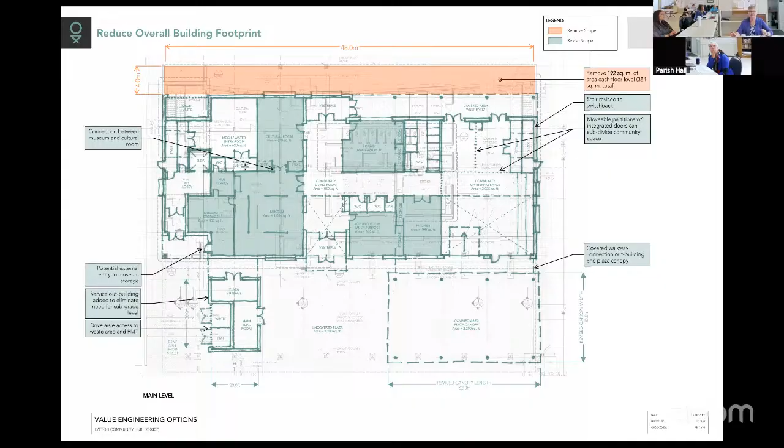Sorry, go ahead. Natalie, can you expand it at all? Yes, certainly, thank you, absolutely.

Thanks. So, the biggest impact of that is essentially that once we pulled out the basement area as well, we had a couple of spaces that weren't fitting well into the revised floor plan.

That was specifically the plaza storage and the electrical room, because we're trying to bring all those service spaces—the mechanical room, the electrical room, and the storage spaces that were in the basement previously—up to the ground floor.

And so that starts to eat into the usable floor area for the library, the museum, the community gathering space, that sort of thing.

So to avoid having too much of an impact there, the main planning change that you're going to see here is what we're showing: a small service building.

Sorry, sorry about that, I don't know what's happening there.

A small service building in the plaza area, which has now been opened up by reducing the canopy size. This building would include the plaza storage, the main electrical room, and then we also would be capturing the PMT, the pad-mounted transformer.

That's a large electrical item that needs to be on site, so we could include that and conceal it within this structure, as well as an enclosure for the garbage and waste, which is something we hadn't previously addressed in our planning.

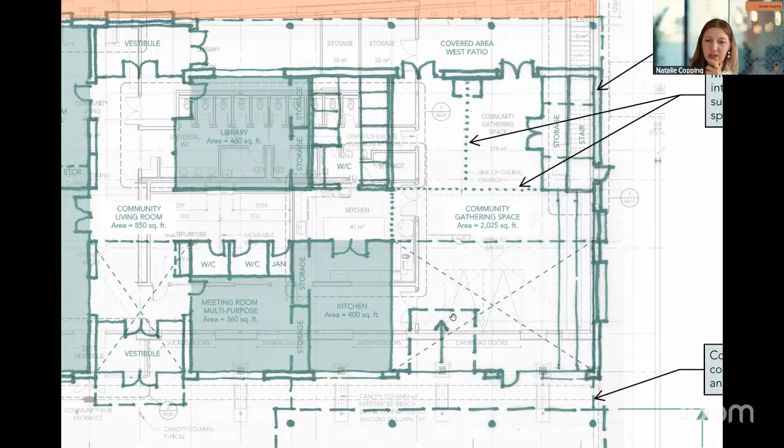Other than that, the dashed lines here indicate the double height, so we've managed to preserve that. The arrow here shows where the overhead door would be coming off of the plaza. You can see the revised area of the canopy, which has shrunk quite a bit from the previous version. So it's now only taking up about 35% of the plaza space.

So we now have an uncovered plaza area of about 2,200 square feet and a covered plaza area of 2,200 square feet. The dimensions are slightly different than the ones we had received in the request, just because we felt that having a slightly shorter and wider canopy gives you a little bit more flexibility to the size of a stage that goes underneath or the kinds of activities. You could have 2 rows of market stalls, things like that, whereas a narrower space is a little bit limiting in terms of some of those functions.

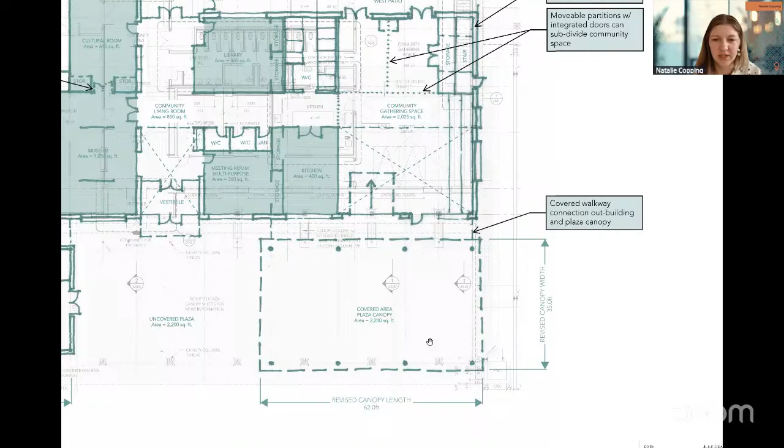So we would recommend going with a slightly wider and shorter dimension, which is what we've shown here. And I think that's it.

We've preserved the drive aisle on the south side here, which is needed to access the residences. So the suites now, with this service building, have a little bit more of a private entry. It's not right off the hub, and we do have this building creating a buffer in between the 2 entrances to the building.

This storage or service building also provides that windbreak for a substantial portion of the plaza, which is helpful. So rather than having to construct a separate wall for that, we can use this building wall to help shelter the rest of the plaza space.

That is, I think, it for the ground floor. Maybe the only other thing is you'll see here we do have that covered patio space preserved, so we have a nice space to sit and look out at the west side of the site and the views that way. And that is it for the ground floor.

Are there any initial questions about the planning here to address before we run through the second floor? Sure, let's go through some questions and comments with this before we move upstairs.

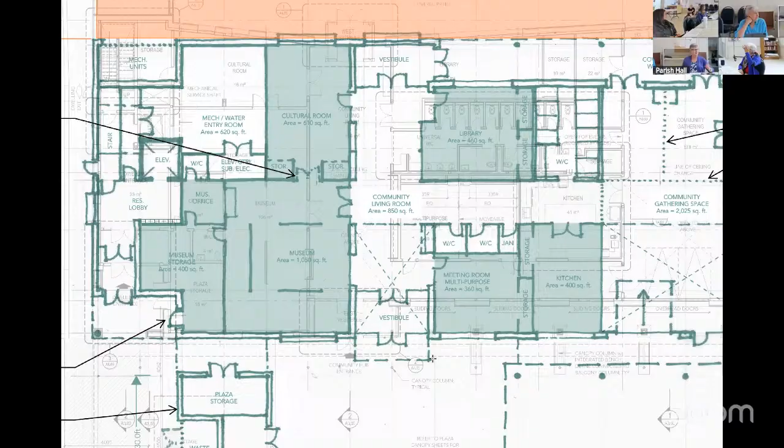Councillor McCann: Can you tell us the ceiling height of the main floor, not the double height? How high are the ceilings on the main floor? It's about 12 to 14 feet. It depends - some places we're proposing dropping a drywall ceiling to hide services, ductwork, that sort of thing, and in other areas the ceiling would be exposed. So about 12 feet on the lower side and 14 on the higher side. Okay, thanks.

That gives us a sense of how, even if it's a smaller room, it'll seem bigger. That's true. Some places like the washrooms, we'd probably bring it down lower—it would feel a little strange to be in a 14-foot toilet stall. So we'll modulate those depending on what makes sense for the room.

But yes, they're decent height ceilings. Okay, Councillor Lightfoot. I generally like the layout, but I'm drawing a blank when it comes to what that service, main electrical room and plaza storage would look like from the street. I think you'll be able to see that character in the 3D views. We'll show you those in the next couple slides once we get into those 3D views.

I think that'll help you. Tessa? Yeah. Good. Councillor Michelle, do you have any comments at this time? Not right now, no. I apologize, but I didn't mention that it doesn't look like Councillor Toss was able to join us today.

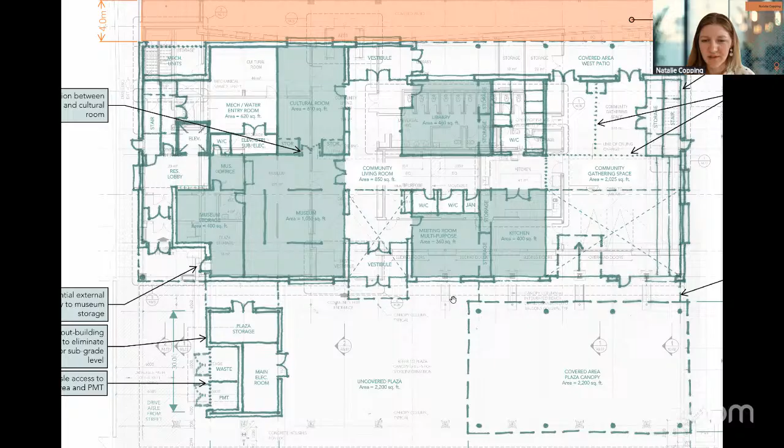Thanks. Are there any other comments at this time? Generally, I really like this plan. So maybe what we'll do is move on to the upstairs, and then maybe more things will crop up for people. Okay, sounds good. Thanks everyone for the comments.

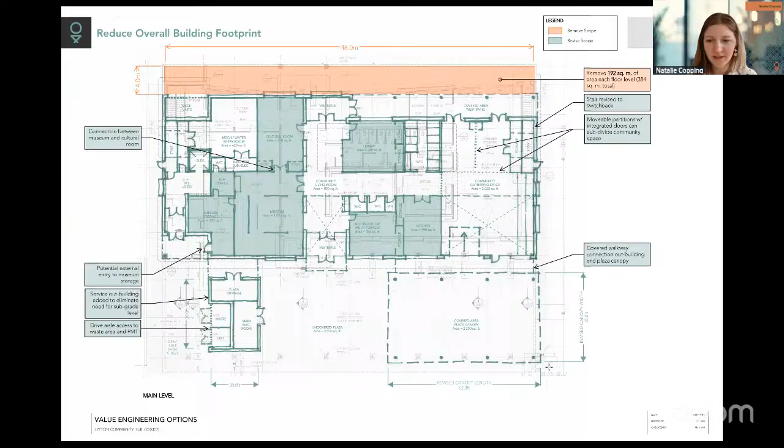The upstairs is simpler, so we won't spend as much time on this, but the main takeaway is, as you can see, that same portion of footprint has been reduced on the second level, partly achieved by removing the balconies. We have shown these little bump outs because we are still providing those Juliet balconies that were requested.

That's about a 2-foot walkout, and you'll see that in the 3D views a little better. The other features here are that we've kept the stair on the south side generally in the same place with the elevator, so you come up in the same location as before. There's some mechanical service space behind that needed to get the services from the ground floor up.

And then across from the entry on the south side, you'd see a storage room that we've added, because that is one of the things that was in the basement level that unfortunately we just couldn't fit into the hub level once we removed the basement. So we've brought that up to the second floor, closer to the suites.

And what we've done to accommodate that is we've reduced the suite count by 1. Instead of having 2 one-bedrooms in this southeast corner, we have a larger 2-bedroom and then the storage space. The storage space is showing storage lockers or units, about 3 feet by 6 feet by 3 feet high, stacked two tiers. So that's why we've got the count as it is here.

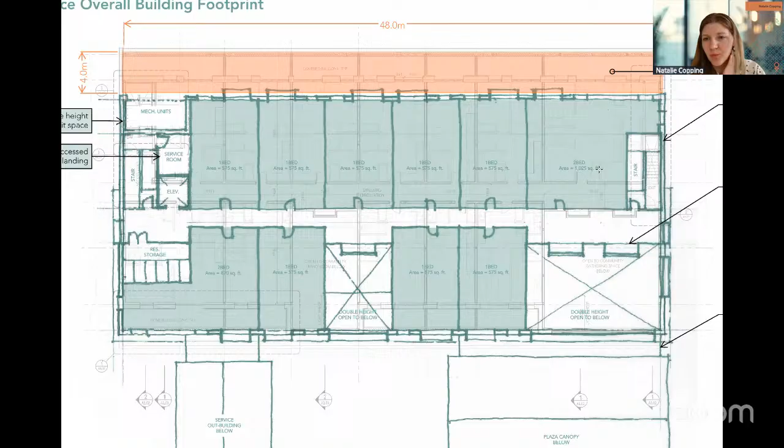And so then we have that one L-shaped 2-bedroom just behind it. We've got the areas for each suite noted. In total here, we're showing 10 suites, 2 of them are 2-bedroom—one slightly smaller, and one larger up on the northwest corner.

The other change in this plan, you'll see along the hallway—this is actually a code requirement—we have the corridor bump out in a few locations to provide a turnaround space. If somebody were navigating this in a wheelchair, you need a wider space every certain number of meters to allow someone to turn around and get situated.

So we have one at the main entry on the south, one here where there's an outlook down into the community living room below, and one at the far end that looks down into the community gathering space. The stair on the north side has been revised from the original version, which you can see underlaid here. It used to be a straight stair all the way down, and now it's a wrapping stair, to make sure the stairwells structurally align on both sides of the building. That's where we have that second two-bedroom. The other suites are all the same size, just shy of 600 square feet, and those are all one bedroom. So currently we're not showing any studios, just one bedrooms and the two-bedroom units.

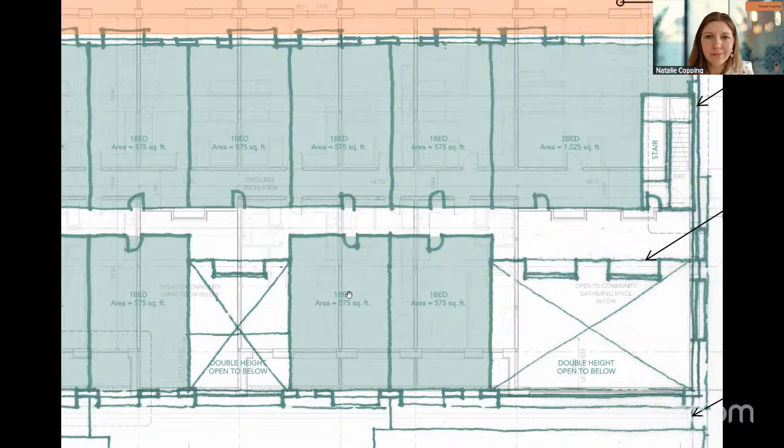Okay, any comments on the second floor layout? Councillor Lightfoot: I just know that earlier in the process we decided that one of those units would be designated as a handicap unit. I understand this is just a rough drawing, but is that still the intent? That is still the intent. Absolutely. Thank you. Other comments and thoughts?

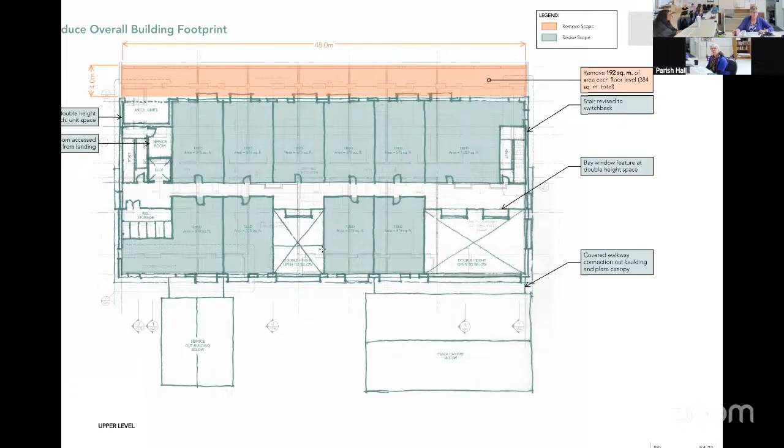Councillor McCann: I'm looking forward to the 3D thing because it'll probably answer my question. But the two double height spaces, it says bay window feature, so it sounds like it may not be just all open, that it's closed in with glass. I'm curious about how that will actually look.

Yeah, so these are almost like a little portal window from the second floor. They're not open to below, it's not a mezzanine. This is an actual window from the second floor hallway looking down into the space below. This is partly to get light in there, because we have these really nice big windows over those double height spaces, which you'd be able to see out of from these portal windows on the second floor hallway. So that's a nice way to bring natural light into that corridor. And also, as we commented, we needed these expanded spaces for accessibility, so we imagine these could have a little bench there if someone's spending time in the hallway. But it is fully closed off and sealed from the floor below—there has to be a fire separation, so these would be fire rated windows and things like that.

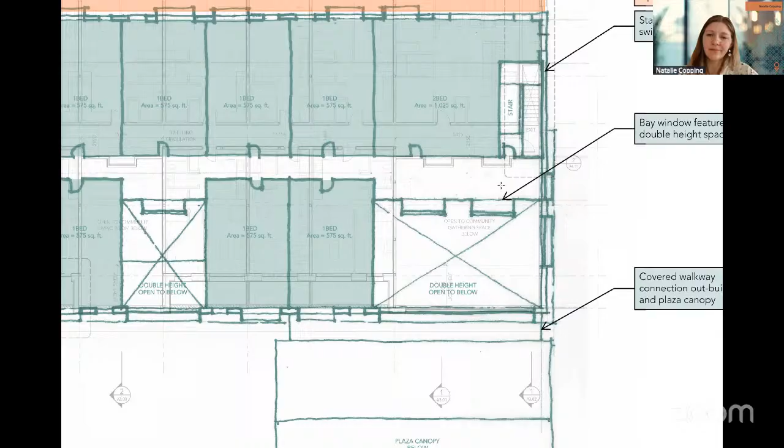Oh yeah, cool, thank you. Councillor Michelle: No questions right now. Okay, thanks. Well, both floors are looking a lot closer to what I think we discussed at our meeting, and I don't have any concerns, anything jumping out at me to say no way, stop, redo it. So, anybody else? Any other comments, thoughts?

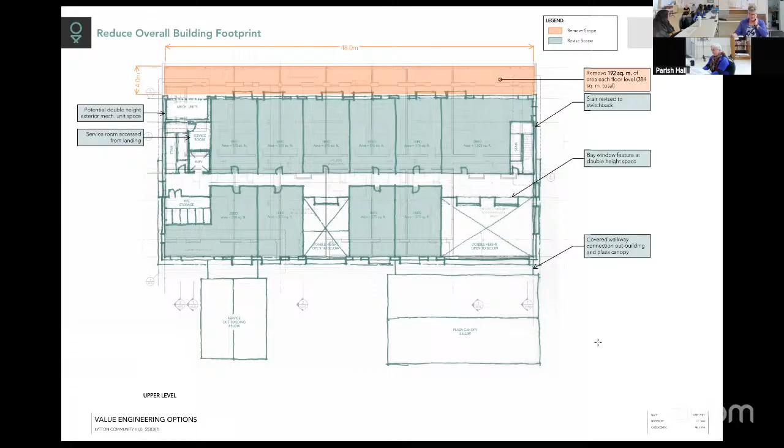Councillor Lightfoot: I just have to say I'm relieved that the gathering space is as big as it is, because I was somewhat concerned that it would be so small it wouldn't fit our needs. Right, and with the plaza in front and the walkway, the community living room going up to it, it gives expanded space for functions.

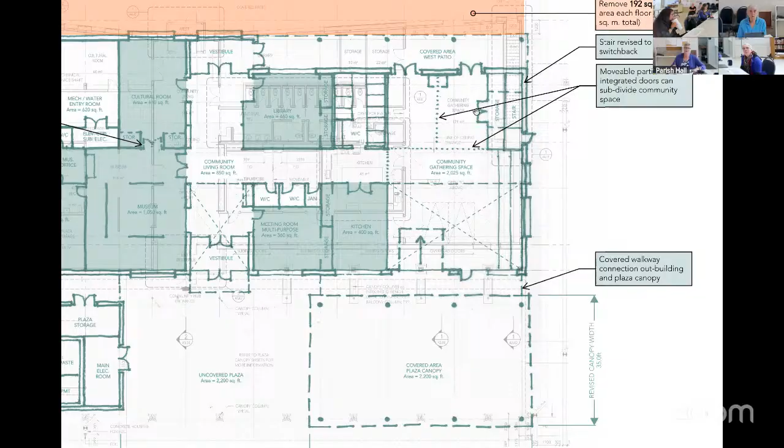So, someone remind me about the community gathering space seating—what's the capacity? The capacity is 250 people, which is what was requested. That's based on floor area; we do a calculation for non-fixed seating that tells us how many people you can have in that space, assuming you're using movable seating and tables.

So that's 250. The only fixed seating we were proposing—and we'll get into this in detail once we start designing the interior more—was to potentially have some benching along this north wall. That's because built-in seating there would provide somewhere people could come and sit; it's at the end of the stair where the wall bumps out anyways. We imagine, from what we've seen in this space so far, that if you were to host a presentation type event, you'd likely orient it toward the south wall, because that's your biggest continuous uninterrupted wall, where you won't have backlighting since the windows aren't right behind the speaker—which would be a challenge on the west or north side where we've got windows. And because of where the overhead door is, you likely wouldn't be standing right in front of it.

We imagined an event scenario where somebody speaking or presenting would likely use this west wall, or south wall, as a backdrop. Having fixed seating on the north side might be practical and nice to have somewhere to sit even when the space isn't set up for events.

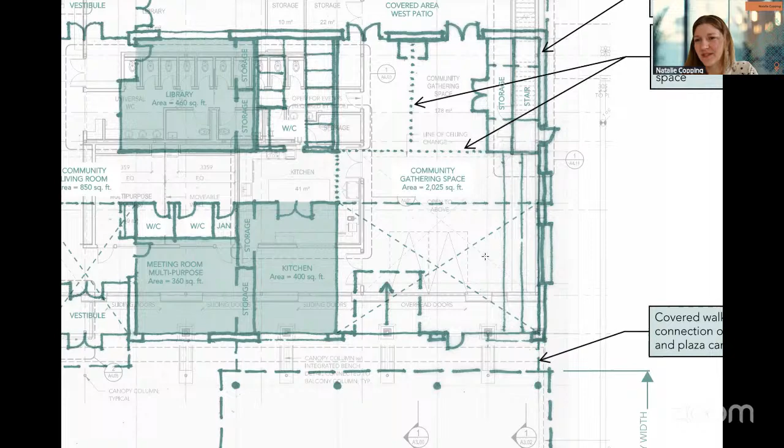Let's look at the massing. I think you'll... sure. Let's move on then. Thank you, okay, great.

Here's some 3D views of what that would look like. To situate you, we're on the north side of the building, looking to the southwest. We've got the west slope at the top right side of the page. You can ignore this box, but that's intended to be the building down by the train track, shown much bigger here than it actually is.

Here you can see the scale of the revised canopy pulled back; it shows a little better in 3D. We've got this service building we mentioned, which would be in the same form and massing as the main hub. All three structures now have the same simplified gable roof line with the same slope. We imagine they'd all be metal roofs and generally match.

The cladding, as Diane said, we haven't finalized materials, and we're incorporating your comments, but we're assuming it will be some kind of mid-tone panelized material. This isn't prescriptive in any way, just shown for general massing purposes. We want to indicate that we'd like to unify the buildings with the materials so it looks like one connected complex.

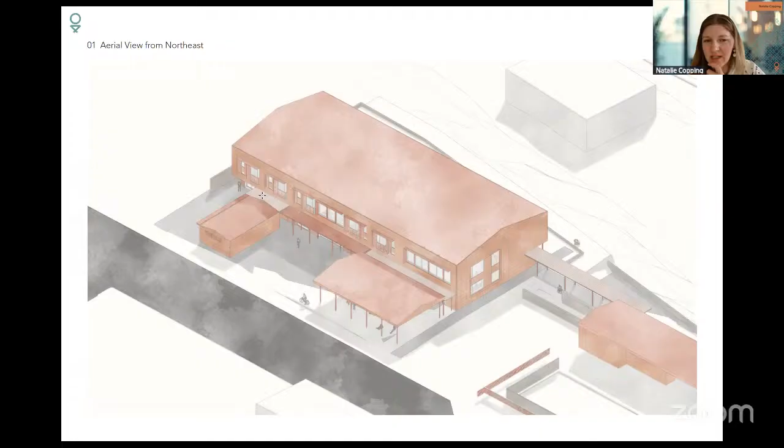That structure would match the construction of the canopy we previously discussed connecting to the pool building, providing shade for someone walking along the building face as well as protection from rain. We've kept it a flat roof so it's not visually competing with the other structures on site. It would be very simple construction.

Other than that, you're starting to get a glimpse of the balconies being removed, with smaller Juliet walkout balconies added with some screens and shading elements. You'll see that better in the coming views.

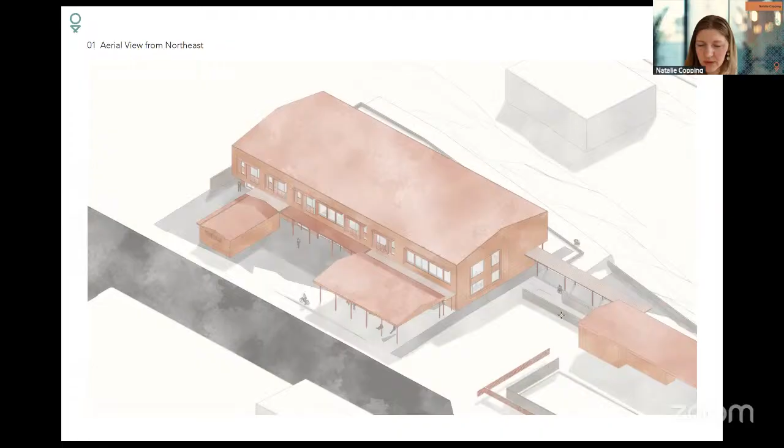Here's another view from the other direction. If you're somewhat to the south looking to the northwest, you can see where the entry is covered. We've reduced the windows on the south side of the building, generally tidying that up, and added shading screens at most windows that require shade. We've been running sun studies to figure out how deep those need to be and the best location, to keep sun off those windows at the hottest time of day.

In this view you can also see a bit of the south side of the service building, which would have the garbage enclosure, and as I mentioned, this large electrical box that Hydro would need to access every so often.

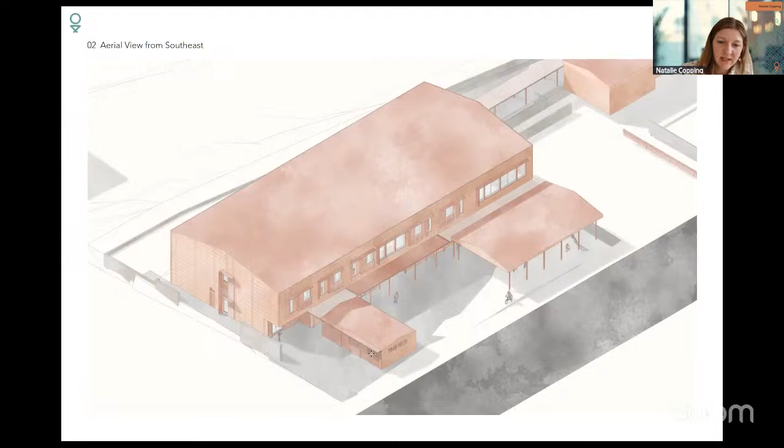Moving through, here's another one of the entries, giving a better sense of scale with this service building providing a windbreak and possibly a backdrop if any events were to happen in the center of the plaza or open space.

You can see that coverage to walk across the front of the building. The museum still has good presence there. Whether or not there's a window, this could be some kind of display for the museum or just signage.

I hadn't mentioned before, but the dormer above the community living room has now been removed, so now it's just a straight roof running across, and the window size has been reduced somewhat. You can faintly see in the back of this window that portal window from the second floor, showing the connection between the two from the second floor corridor. And then there are those Juliet balconies again.

And a little peek of the revised canopy structure, which in this case is much simpler than before with the repeating roof lines. There should be some kind of truss system in there to support that, and just simplified columns.

Another view looking mostly at the service building. Here we'd be imagining large metal, perhaps perforated doors that give airflow into the waste enclosure and electrical space, but are easy enough to access when needed. There's a bit of canopy extension on that side, so if someone is taking out the trash or recycling, you have a little coverage from the elements as you walk out under that building.

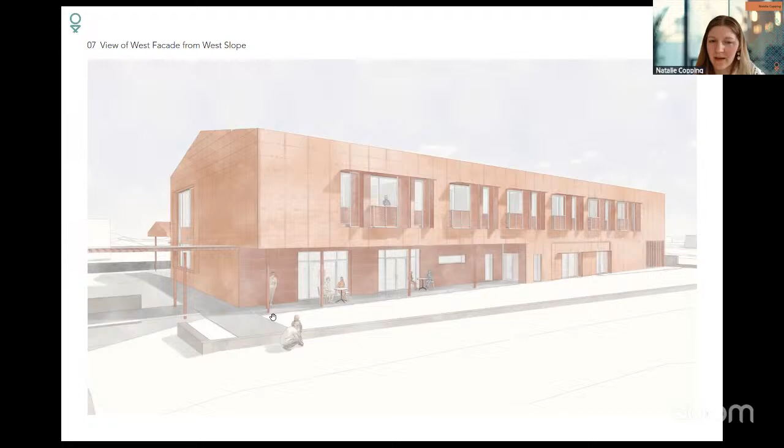This gray wall you're seeing is just indicating the extents of where the landscaped area would be. That's all shifted to the west now to avoid the steepest part of the slope, so this is now going to be relatively flat. That would be the kind of backyard to the hub, as it were.

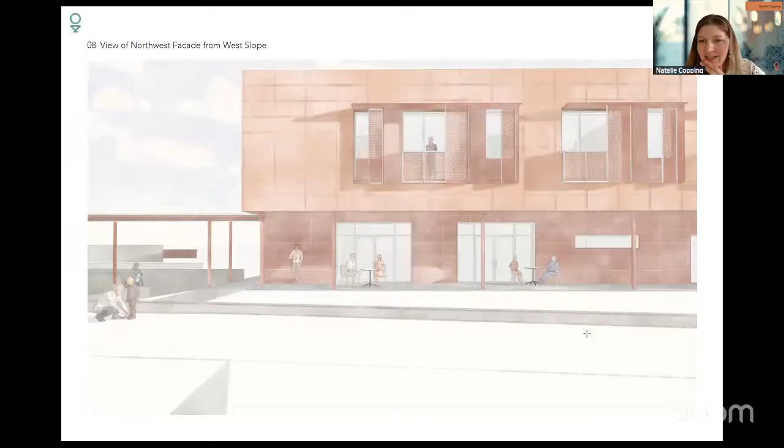This next one zooms in a bit further on the same area, just to give you a sense of the relationship between that second floor, where you'd have these little walkout balconies, and the patio below, as well as this canopy connecting over to the service building.

We've also shown some Juliet balconies—we haven't finalized materials or exact design, but as I said, we're just running some sun studies.

This is mid-afternoon that you're seeing here, so we're able to keep the sun off the windows until quite late in the afternoon, when the sun is really coming in directly from the west, at which point someone would probably have to draw the shades. But until about 5:30 p.m., with strategic placement of the screens—we're showing some perforated metal screens here, and then these metal panels—you're able to keep that sun off quite effectively.

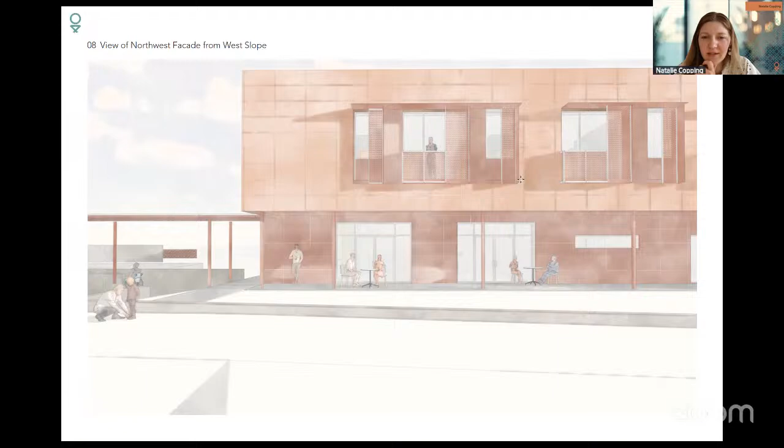So that's really the strategy with the design here: to make those a comfortable shaded space for as much of the time as possible.

This is the last one here, which gives you a slightly different angle, so you can see the depth of those walkouts and the size of those, with a little bit of a cover at the top for sun and rain.

As I noted, we're showing these as perforated metal, so you can get some light in, particularly in the shoulder seasons and winter, but it helps block a significant portion of that intense west light in the mid-afternoon. And that is all that we have for you today.

So let me know if you'd like me to go back to any particular images, or you want to talk about certain features, and I'll open it up for discussion from council.

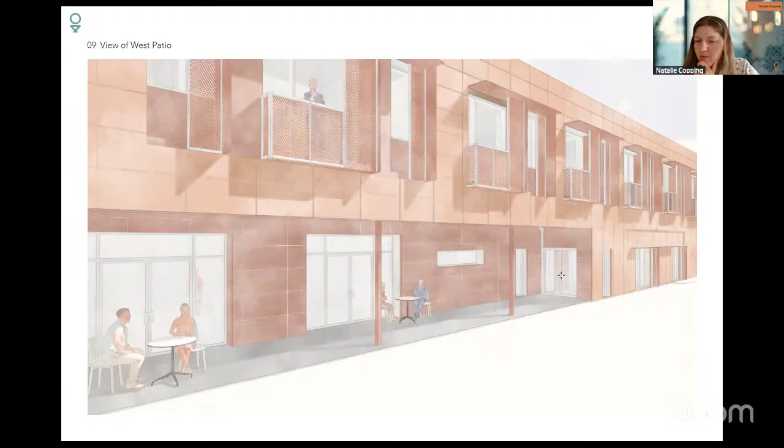We've shown a higher window because you could get some nice daylight into the washrooms at the higher level. We did change this in the floor plan that we showed you, so this would be pulled back a bit, and we'd have a single larger window for the library. What you're seeing here, we had the vestibule extending out further than what we've actually shown in the floor plan. So yes, the library would be here, but with one large window, not this sort of smaller vertical one.

Okay, all right. Yeah. Good question. Okay, other questions? Councillor Lightfoot.

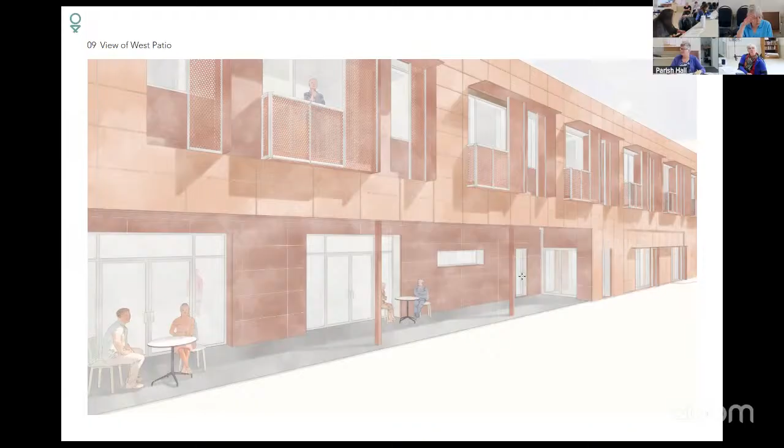When you showed the front view of the building, my main concern was the visibility of the museum, and even the library to a certain extent, but the museum especially. But then further on, you did show that there was some signage below the canopy that said the museum. So that's just something I think we need to be aware of so that it's easily identified.

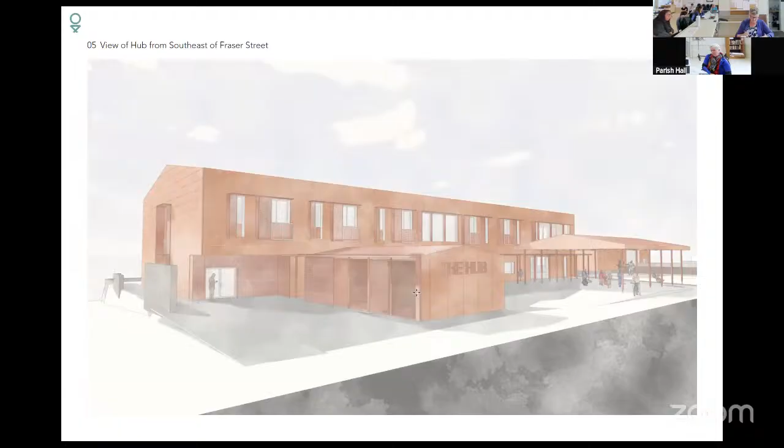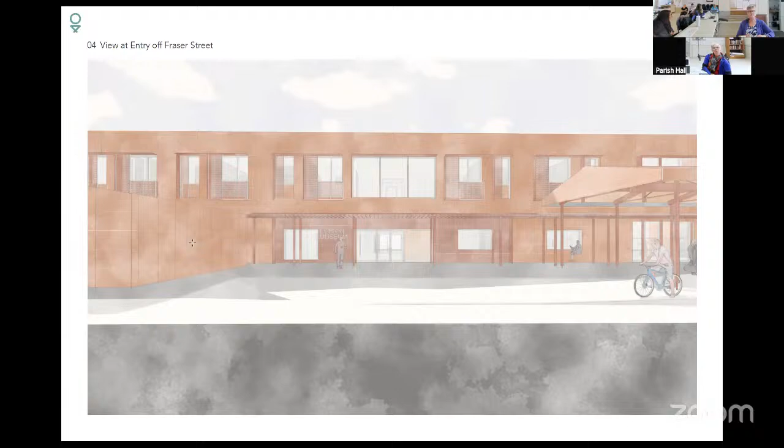But on the mechanical addition on the front of the building, can you show me the other view, front on? That doesn't seem to have a door on the mechanical side on that view, but on your drawing it does. I think not having the door into the main electrical room in the main plaza area would be my preference, just so you could put a bench or some display there and not have to accommodate access on that north side. I'm not sure if it's doable, but I think it would be more useful if it wasn't on that north side.

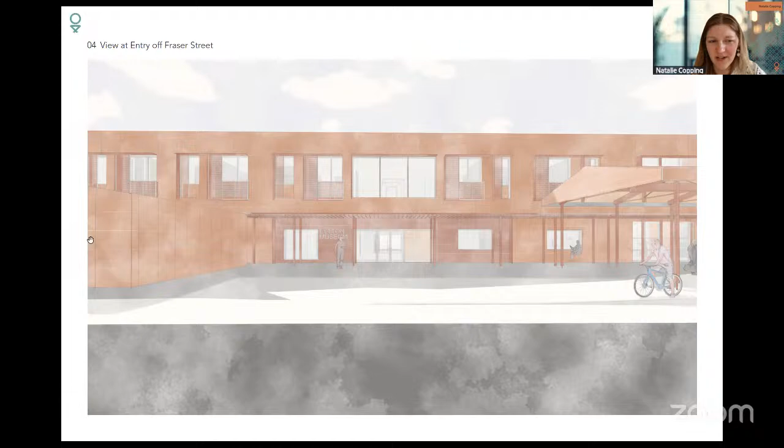Yes, that's a great comment, Councillor Lightfoot. We actually changed this very last minute because we had the door here, and I completely agree it didn't look great, and we weren't happy about having it right off the plaza. At the last minute, Colin from our team looked at it and figured out there's a way to reorient the planning for that space to avoid having the door on either the Fraser Street side or the plaza side. So we'd only have access doors on the south side and on the side that faces the hub building, which is more tucked away. We'll adjust that in the planning, and that was the intent, to keep doors off of those higher visibility areas. We just didn't have a chance to implement it yet. But great comment, we're thinking the same thing you are here.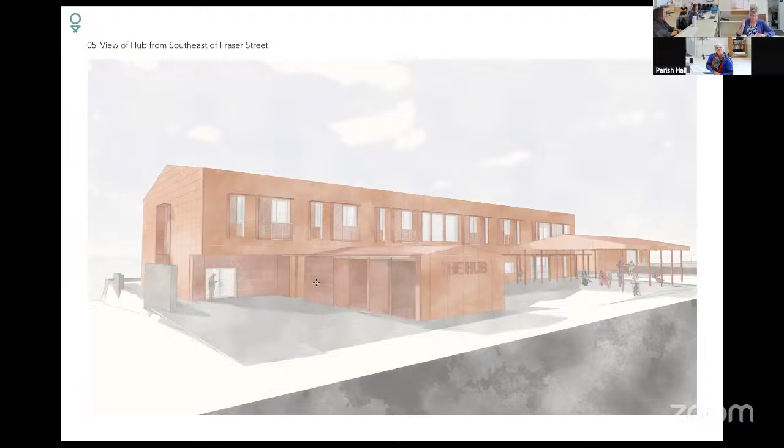Thank you. I have a comment and a quick question. My comment is when I first saw the plans and saw the service building, I thought the end of that building would be a great place to have a sign, you know, welcome to the hub or whatever. So I'm really pleased to see what you've done there. That could even be a place for museum, library, whatever signage, right? It's so visible from the street.

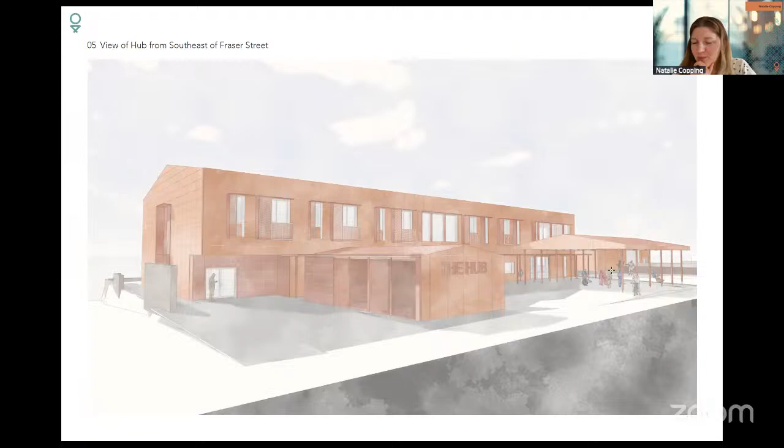And then just a quick question about the canopy. How high is it, what's the height? The lowest portion of the canopy is close to 15 feet right now, if I recall correctly. And then the very top, what was it? That's okay, I was more thinking about how low it is. Yeah, it's about 15 feet. We haven't decided exactly where we wanted that line to be yet. I had originally drawn in a stage to see where the top of their head would fall relative to a stage, but if you have particular requests on that, let us know, because it's not finalized yet.

Right, no, that's good, it was just hard to visualize. Other questions, other comments? What are your thoughts, Councillor Michelle? How are you feeling about this? I'm happy with this layout now, I think it looks good. Yeah, thank you.

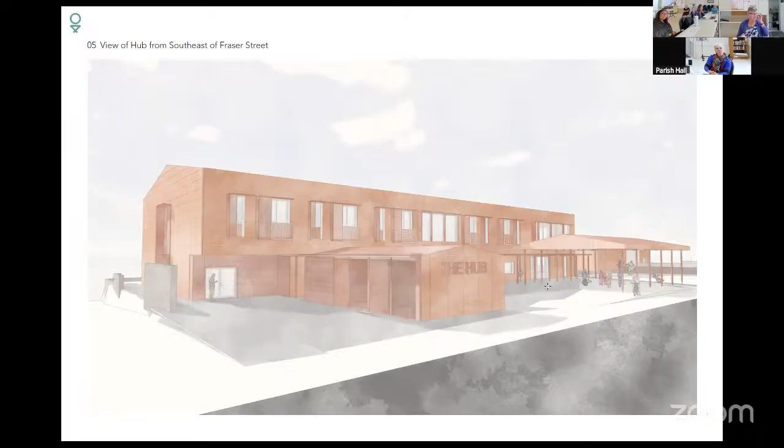Anything else? I like that we can actually see the drawings more like what it'll actually look like. That really helps to get a better sense of what we talked about. I like the way the Juliet balconies turned out - I was trying to picture them, and it's nice to see how you've incorporated that. I like the back west side of the building, because that was really hard for me to imagine. Before it seemed like it would just be a real boring part of the building, but having that little bit of shelter there adds a lot to that side and extends its potential for future use.

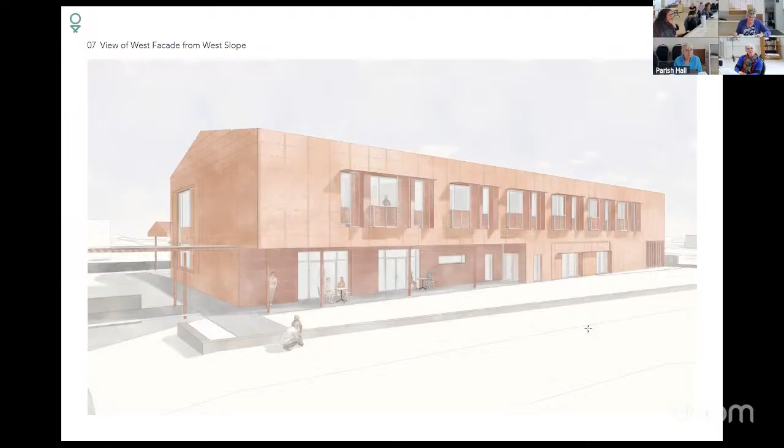So I'm pretty happy. And the north end with the windows, you got there.

Okay, so there's that big X cross - what is that? That's actually to do with where there's some structure. We can't just have, I mean, these are already quite large windows, so we wouldn't necessarily want to run them all the way up - you'd have like an 18-foot tall window, which is pretty huge. But we do have some cross structure there, so that's why we've strategically blocked that off, because of where there's big steel columns and beams running.

Play around with that so it looks a little better.

Because the high school, when they put the window at the end of the hallway, it was a really nice feature. It brought in light, but then it was this really challenging thing for the janitor to deal with, because children love windows and they'll put their face on it and their fingers on it. So if it's touchable or accessible, there's that whole concept to deal with - like, hey, let's put the light in, but let's make it easy to clean too.

Okay, good. I'm intrigued to see how that'll evolve. Are there any other comments, questions, thoughts from council?

Councillor Lightfoot: I just want to thank the architects for working with us to get this within our budget. I assume the ideal client would have lots of money and you could display your expertise and vision in a more extravagant way, but given our circumstances, I think this is a really good design, and I want to thank you for listening to our financial concerns and helping us be reasonable in this project.

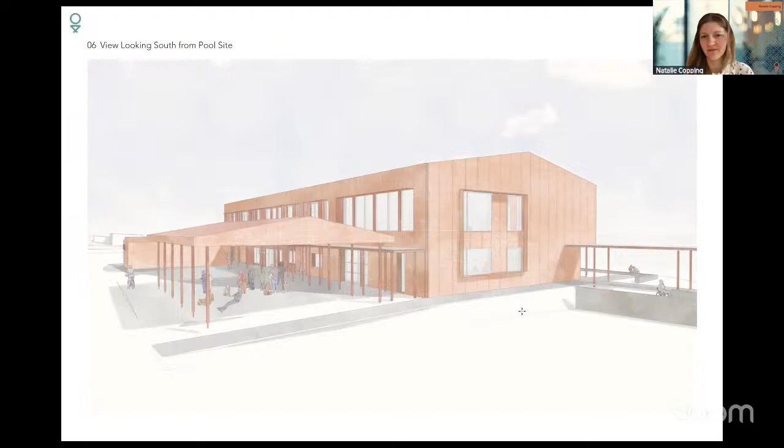And I think, Natalie, we thought it's probably what, a month and a half? It just depends on the schedule of the other consultants - we've got a team of about 7 different disciplines, but I would imagine kind of 4 to 6 weeks, that we would then bring back the completed package for approval. And then the next step. Yeah, exactly. Okay, perfect.